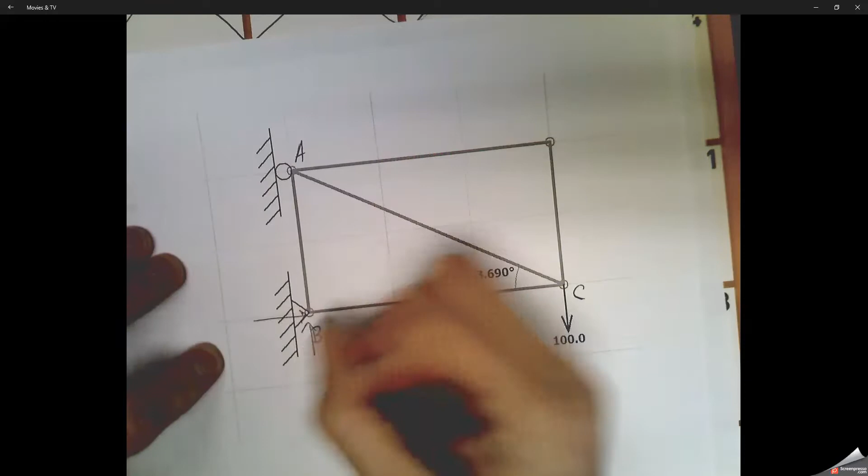All right, so here we're looking at simple truss problem question number 3. A little more interesting with the box rectangular frame there. But still, we've got member A, B, and C. Save some time from the previous two videos.

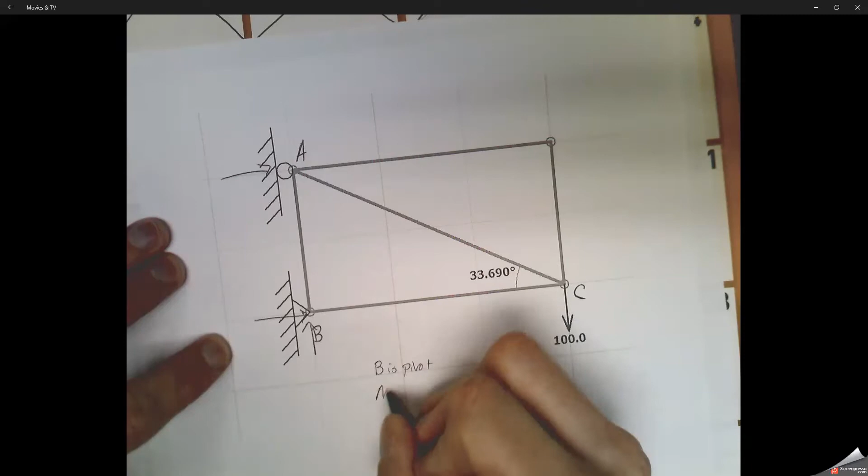We're going to put those reaction forces of A being the roller of 1 force and the pin being 2. We're going to take B as the pivot point, and we're going to look at the moment at A and the moment at B. Why aren't we using the one in the top right corner? There's no force there, so 0 times anything is 0. It's going to cancel out for us.

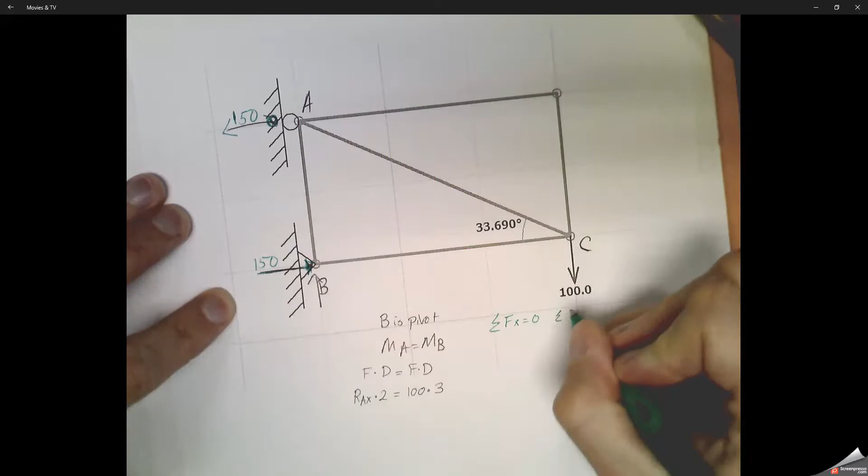So A is 2 units away from B, and we don't know that reaction force in the x direction. C is 1, 2, 3 units away from B, and its force that's given to us is 100. So 300 divided by 2 gives us a reaction force of pin A, 150. Why is it pulling to the left? Well, C is pulling clockwise, so therefore A needs to be pulling counterclockwise to fight that rotation between the two.

So then sum of all the forces in the x direction needs to equal 0. So therefore the force at B in the x direction needs to be 150 going to the right. And therefore also that y direction at B needs to be 100 going up to counteract and fight with that other force at C that's going down.

So if we look and isolate at pin B, we've got to find member AB, and we've got to find member BC. Why do we start at B? There's no angles. Let's stay away from angles for as long as we can and find some simple stuff, because we know the sum of all the forces in the x and the sum of all the forces in the y needs to equal 0.

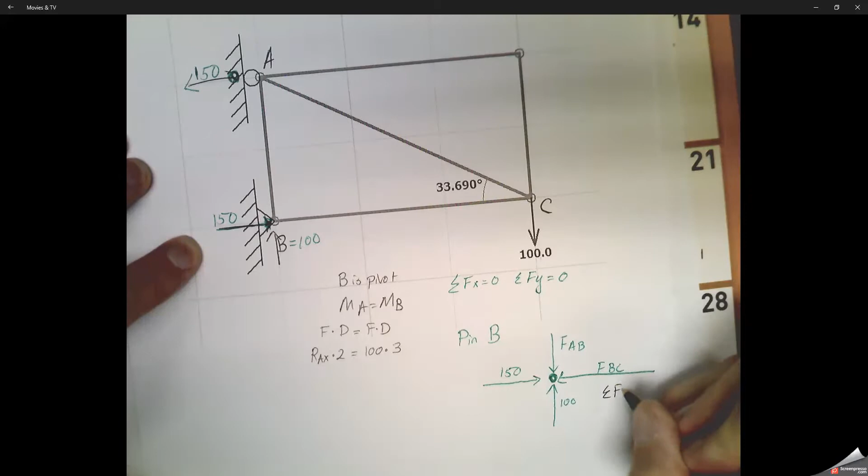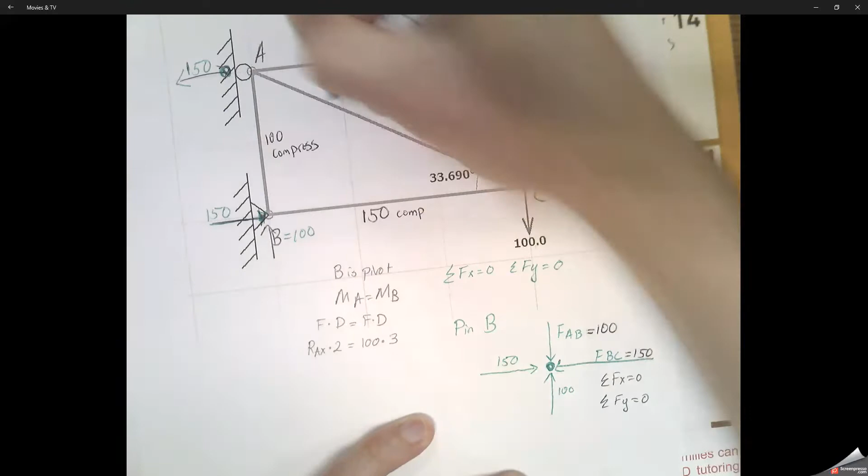So what do we have? Well, all the x's needs to equal 0. So if we calculated 150 to the right from the moments, that means we've got to have 150 to the left for FBC, and we've got 100 up from the moments, therefore we've got to have 100 down, so FAB's got to be 100, and everything is going to compress onto that point that's right there in order to get them equal. 150 to the left, the other one's got to be 150 to the right, everything's compressing on that.

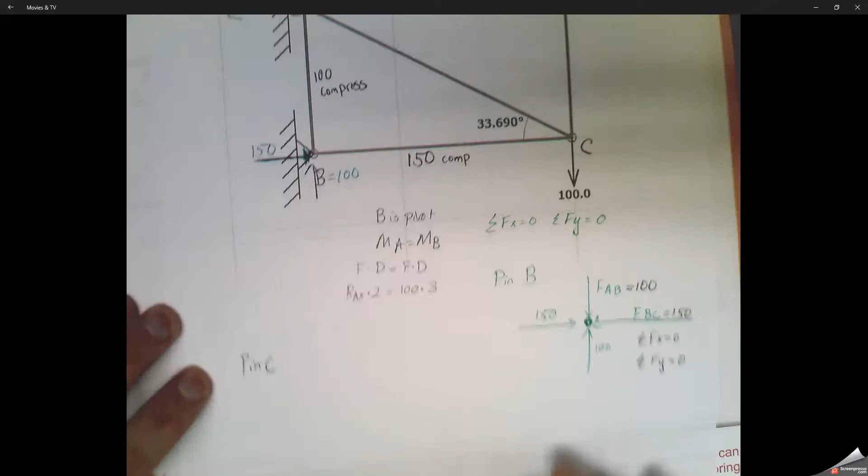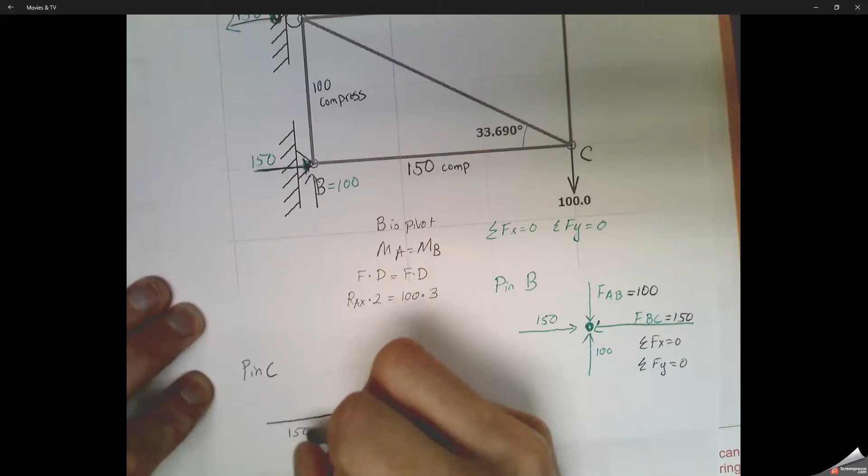So now we've got to calculate AC. We'll work our way outwards. We've got to go and calculate AC, so we'll go to pin C. We could have went to pin A, let's go to pin C. What different things are interacting at C? Well, we have the given force of 100 units. We have member BC, which we know already, which is going in the x direction. We have member now AC, which we do not know anything about, but we do know it's at an angle.

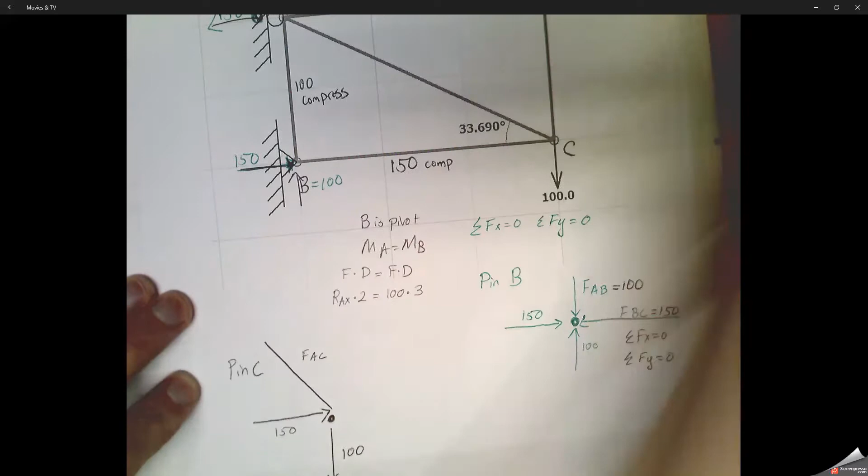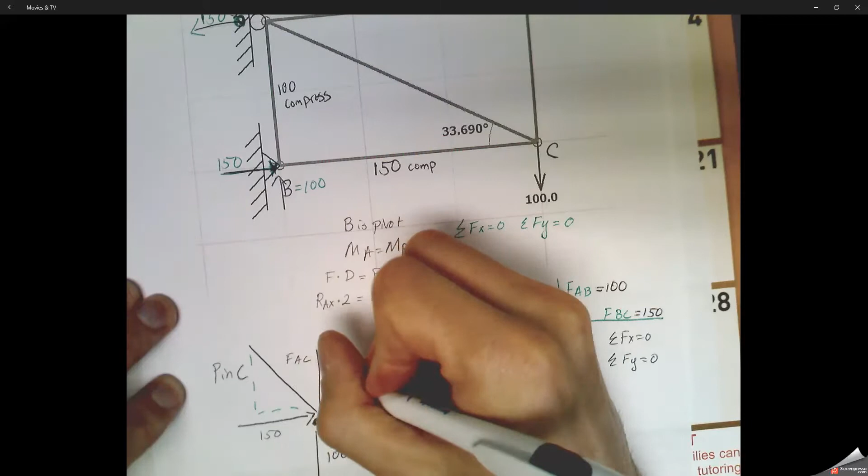So any force that's at an angle, we get its two components. We have its two component vectors, one in the x direction, one in the y direction. And then we have this other member sitting out here, which we'll just call CD, and we can calculate that one. So what do we know? Well, again, we know the sum of all the forces in the x direction needs to equal 0. How many forces in the x direction do we have? We have 2. We have 150 right, which means the other one's got to be 150 to the left. What else do we know now?

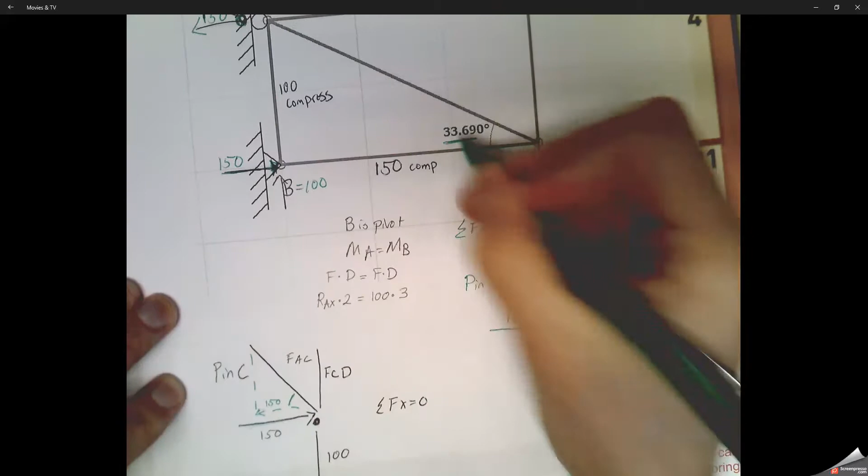Well, we've got a triangle sitting here. We've got 150 as one leg, and we've got an angle of 33.69. So what can we use? We can use some trig to calculate those other two values.

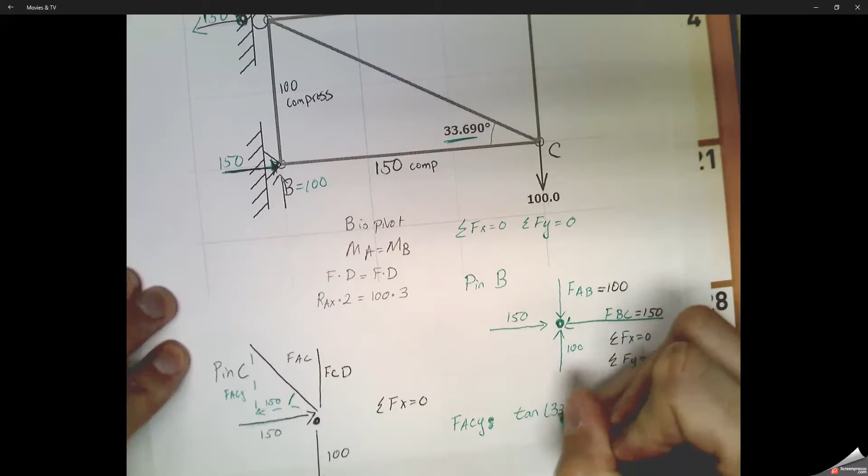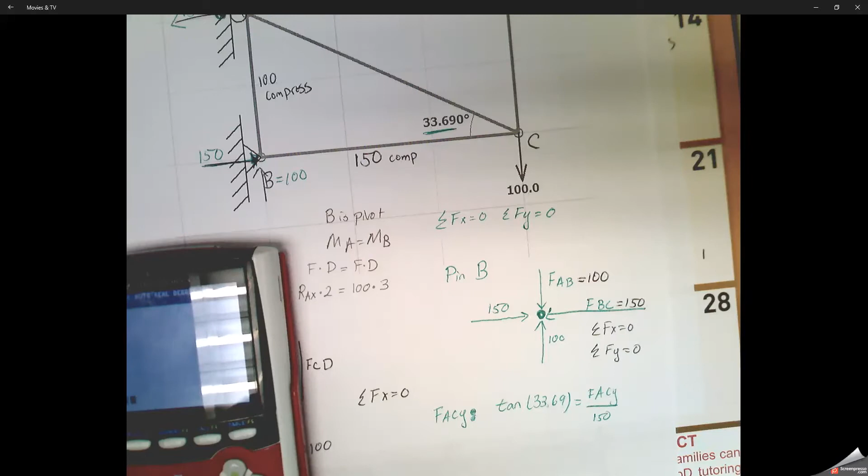So F, the force of AC in the y direction, if we want to calculate for that, that's the opposite of the angle. We know adjacent to the angle, so we're going to use the tangent of that 33.69. It's going to equal to opposite FACY over the adjacent 150. So we're going to take our 150, multiply it by the tangent of 33.69, and we're going to end up with, let's see here, what do we got? Just pretty much 99.99. So we've got a nice looking 100 there.

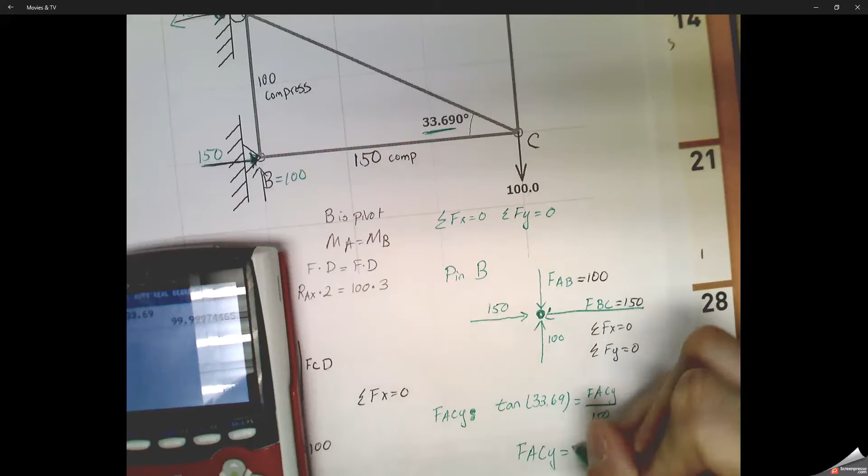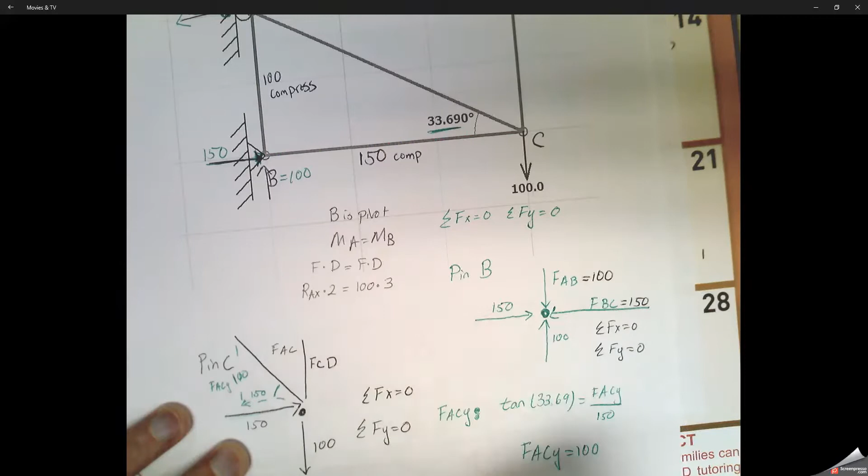So we're going to plug that into our picture and try to keep on calculating and see where we're going. We know the sum of all the forces in the y direction equals 0. So this one we've got 100 going up, since FAC is being shown and proven to be under tension, since the force of ACX is pulling away. So if we've got 100 up and 100 down, those cancel each other out. So what is FCD? That one's got to be 0.

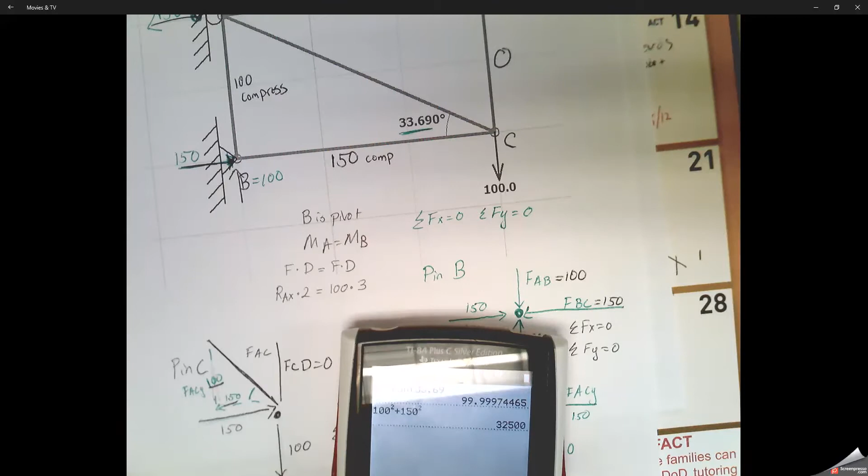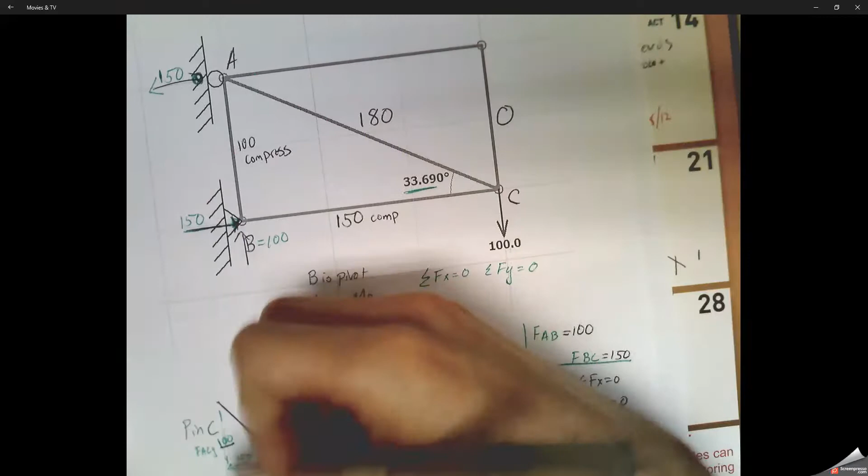So now Pythagorean theorem to find that hypotenuse. One leg of 150, another leg of 100. 100 squared plus 150 squared gives us that tension force of 180 being applied to member AC on this structure.

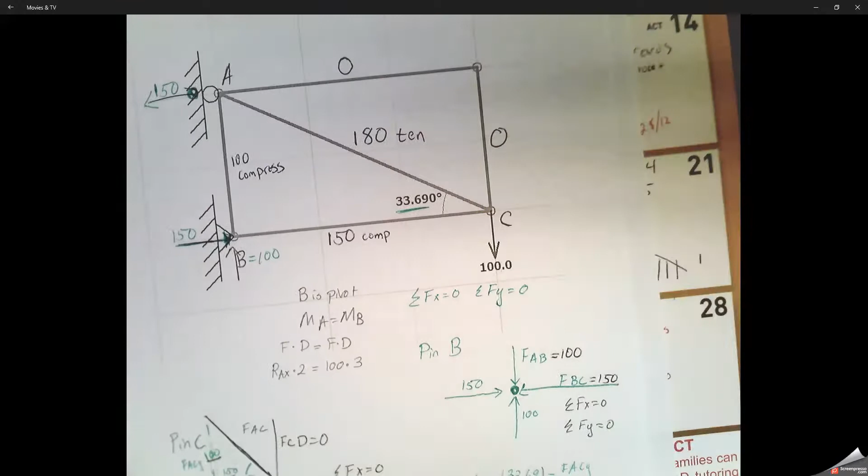Look at that joint D. Sum of all the forces of the x is 0. Sum of all the forces of the y is 0. So if there's only one x or there's only one y, both of those have to be 0 for us.